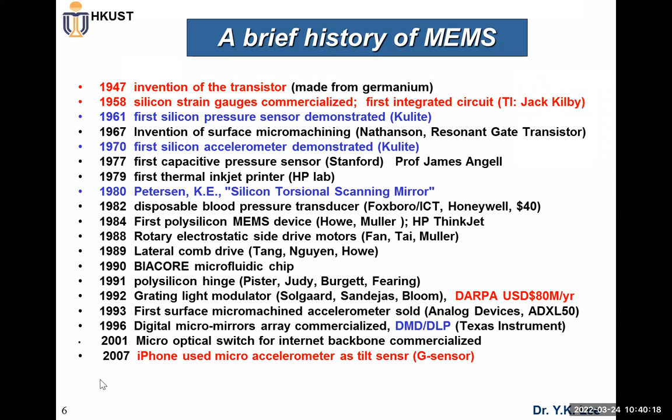Okay, so that of course we also mention about this mature thing. We do spend time to introduce this.

This kind of ITRS - ITRS means International Technology Roadmap for Semiconductor, and it's global consensus. That means leading semiconductor companies and leading semiconductor countries and regions make this kind of roadmap, so that all of you can enjoy

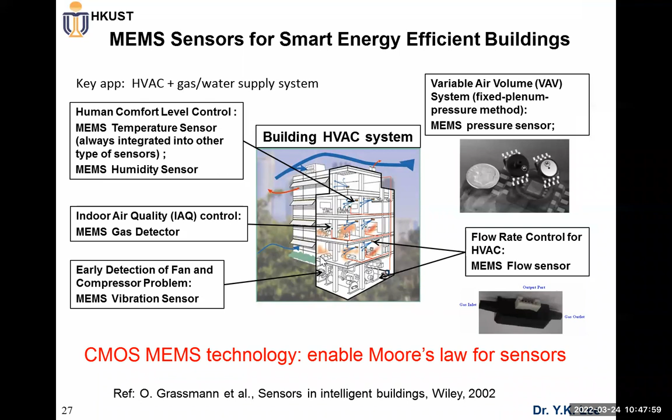Okay, so anyway, as I told you, I had a project several years ago on how to come up with this kind of motion sensor.

Look at the thermal flow sensor, temperature humidity sensor, and thermal comfort, and then smart personalized ventilation, smart window, and building expert work on CFD simulation and AI. So we at least demonstrated we're able to do smart HVAC to reduce energy consumption for at least one room at UST, saving about 20% of energy while maintaining good thermal comfort.

So I just want to tell you this is something quite important, and I do think this kind of micro sensor will really change the world. It's not just me saying this, but all the big companies too - Apple hires a lot of these MEMS engineers. So this is something quite important.

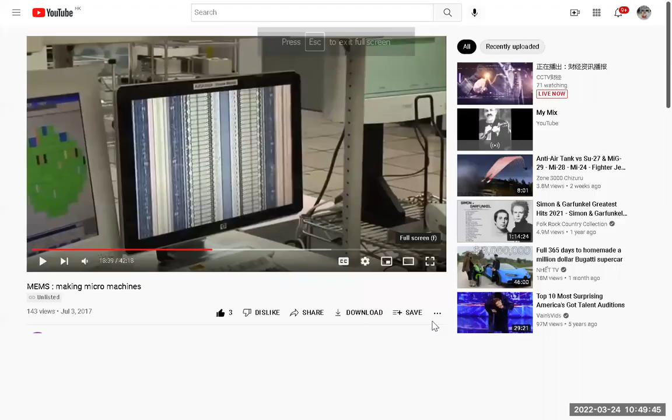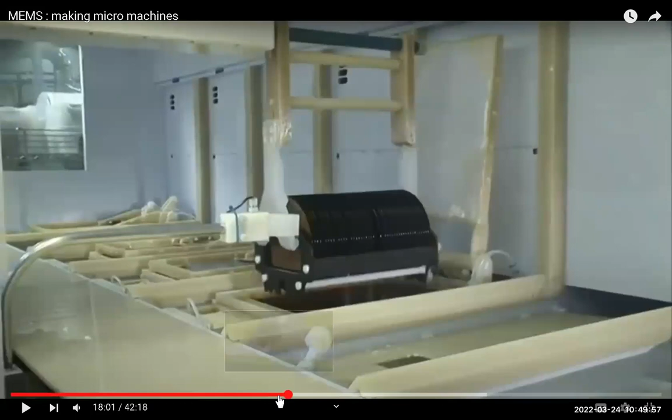All microfabrication processes involve these steps: etching and first patterning. You have the design of a micro machine or microelectronic transistor, from computer software like Cadence, or for MEMS we use another EDA tool like L-Edit. Once designed, you do the patterning - patterning involves photoresist, and then photolithography - and then you do etching, deposition, and doping. No matter how complicated the micro machine is, we have this typical fabrication process based on these 4 steps: patterning, meaning you have an optical mask design and use photolithography for patterning, and then you do etching, deposition, and doping.

Let me try to think - I just want to tell you this is something I think is quite good for you to have a real understanding of. Although you cannot go into a clean room, UST does have a very good clean room, so at least here you can look at how it works.

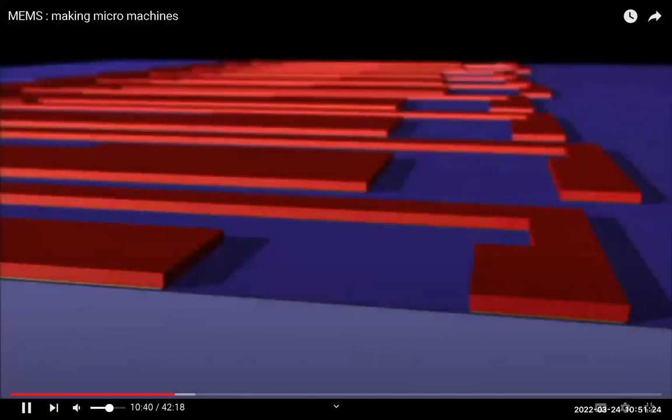The resist is positive. The areas exposed to light are changed chemically. The wafers move back to the track system. Here, developer is puddled onto the wafer, and the exposed areas are rinsed away. It's photolithography. To ensure quality, measuring feature size is important throughout the process. This SEM, or scanning electron microscope, is measuring the dimensions produced by the photoresist process.

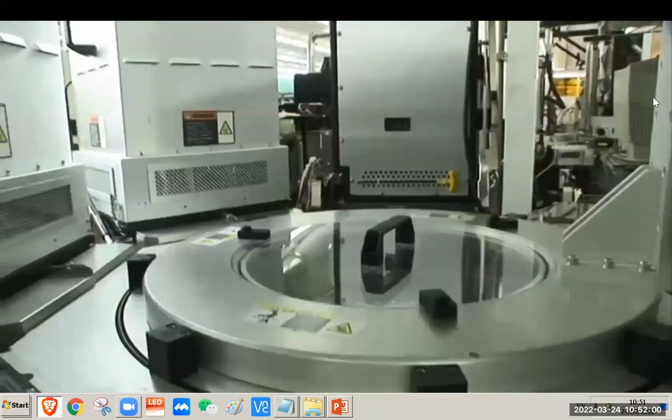The exposed metal will now be etched using plasma. In this chamber, chlorine-based and inert gases etch the aluminum-copper alloy. This defines the resistor leads and removes the highly conductive aluminum-copper layer from the area where the resistor material will be. While still under vacuum, the wafer moves to the ash chamber, where the photoresist and etch residues are evaporated and pumped away.

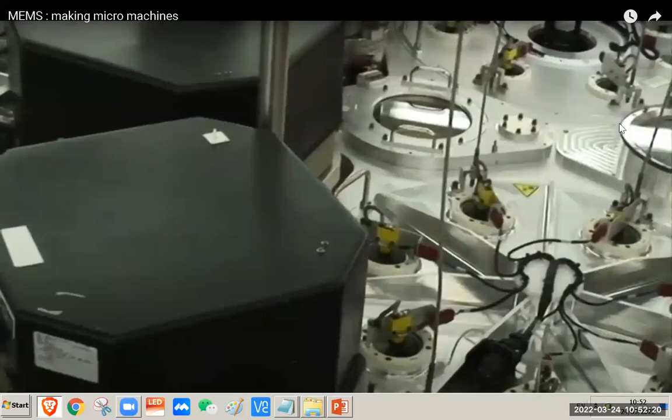The resistor metal is now deposited. After the wafer surface is conditioned, it goes to the sputter chamber, where a thin layer of resistor metal is deposited. Photolithography once again patterns the resistor metal layer. In the plasma etch system, the resistor metal layer is etched from unwanted regions. When current is eventually forced from 2 metal layers to 1 thin metal layer, it will create the heat that fires the resistors.

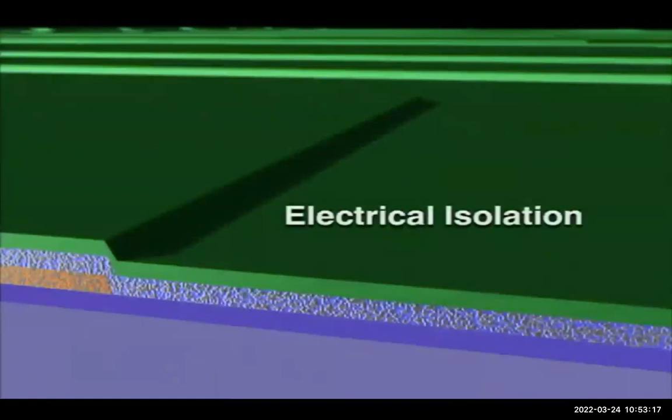A thin film stack of 3 layers will now be deposited on the resistors to provide electrical, chemical, and mechanical protection. This system deposits the first 2 dielectric layers over the resistor. The first layer will provide electrical isolation between the ink and the firing resistor. In the same chamber, new gases deposit the second layer, which protects against the corrosive chemical attack from the ink.

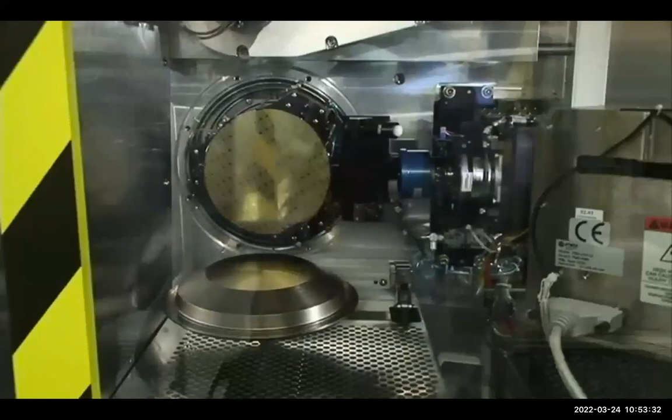The third protective layer is metallic, so it can resist the mechanical forces of the collapsing bubble. The wafers go into a sputter etch chamber to prepare the surface, and then into a sputter deposition chamber, where a thin metal layer is deposited.

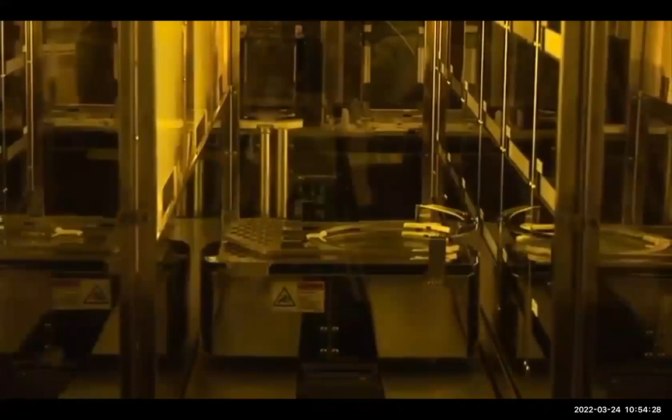Now that the resistors are protected, the chamber walls where the vapor bubble forms are built. The wafers are washed and prepped. A deionized water and ozone treatment removes any residual materials that might remain on the surface from previous steps. The deposition of barrier material used for the chamber walls is similar to the photolithography process. As the wafer spins, a thick negative resist-like material is spiraled onto the wafer. In soft bake, the solvent is slowly driven out to set the barrier material and make it more uniform.

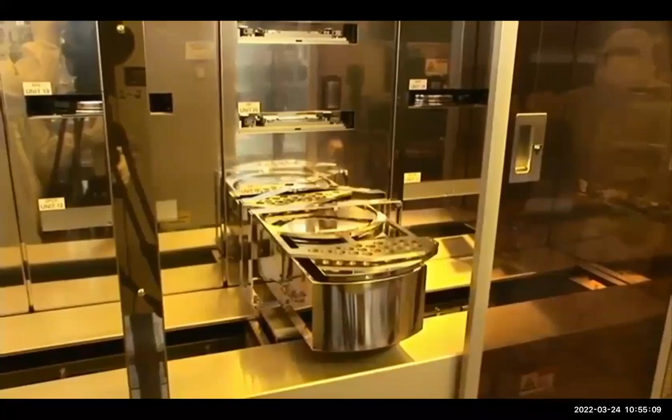In this bake and expose system, the wafers go directly to the stepper where they are exposed. As a negative resist, the barrier material exposed to light forms a polymer and hardens. Because this resist is so thick, the exposure times are much longer than for standard photoresist. After exposure, the wafers move to the bake ovens. The areas exposed to light induce cross-linking and become a permanent part of the chamber. The non-exposed areas are removed when developed.

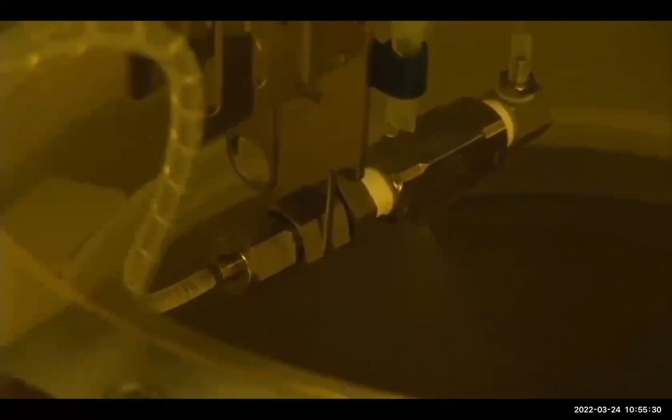Instead of the usual puddle develop, spray develop is used here. Spraying droplets of developer provides a higher surface area that can attack the thick barrier material more easily. A big open chamber now exists. We can see that small pillars have also been created from the barrier material. These pillars at the entrance to the chamber serve as a filter to block particles that might be in the ink from clogging the nozzle.

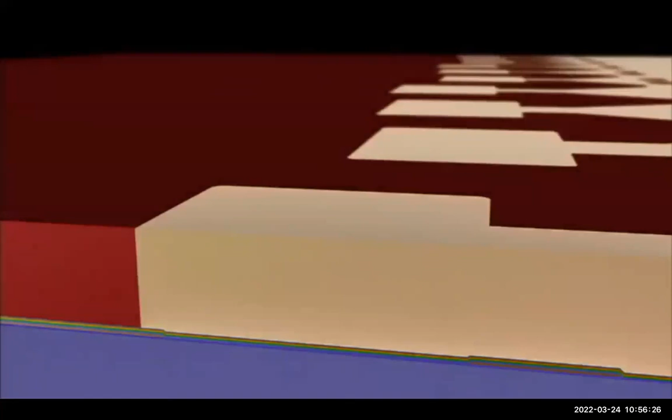After develop, the wafers are placed in an oven, exposed to higher temperatures, and allowed to cure. Thickness measurements are made after each layer is cured. A thick photoresist resin, called a sacrificial wax, is spiraled onto the wafer and spun. The wax fills the cavity and covers the entire wafer. A soft bake sets the wax, and a portion of it is removed to bring it flush with the chamber surface. The wax holds up the shape of the chamber as the building process continues.

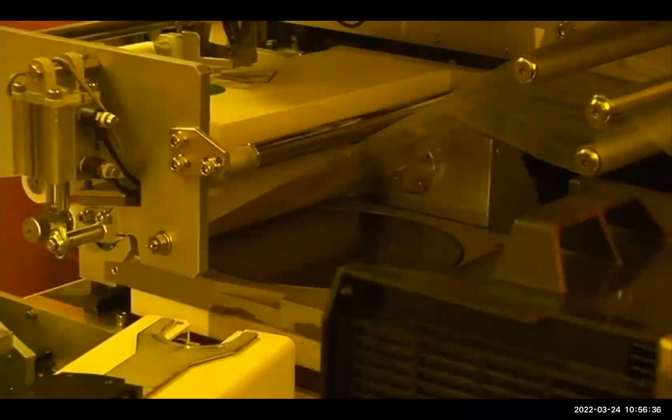In a dry process, a layer of barrier material is pressed onto the wafers to create the nozzles. The nozzle material on this roll is sandwiched between two protective sheets of carrier films. The dry application will minimize the interaction between the nozzle layer and the sacrificial wax. Here, the bottom carrier film has been peeled away, and we see the nozzle material placed directly on the wafer. After the dry film is applied, a blade cuts around the remaining films, and a new layer is prepared for the next wafer.

The robot moves the wafer with the nozzle material and its carrier film to the next stage. In a separate tool, the carrier film is removed. A strip of tape is rolled across the wafer, and a pickup roll lifts the carrier film off.

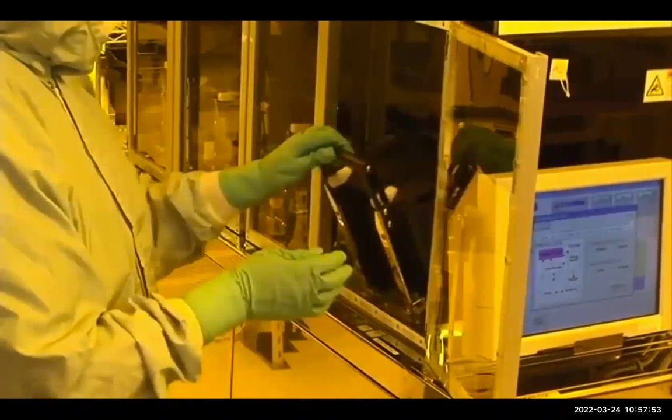Photolithography is now used to create the nozzle orifice. The exposed areas become cross-linked and remain a permanent part of the print head. When developed, the unexposed nozzle material and the sacrificial wax are removed. The wafers undergo a final cure.

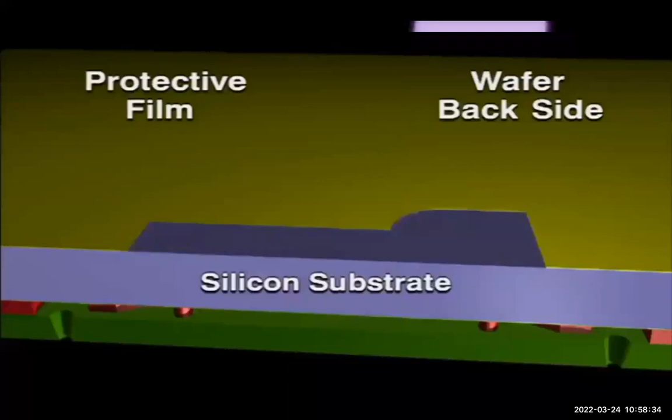To create the channels the inks will flow through, a laser and etch process forms a trench between two rows of nozzles. Inside the laser system, the wafers are placed backside up. A pulsating laser scans the back of the wafer and defines the dimensions of the slot. Without breaking through the silicon, it then drills a deep, narrow trench within the slot.

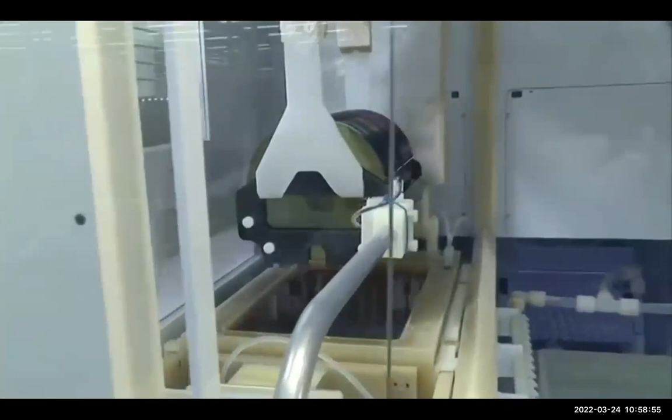The final slot shape is created in a bulk etch process. In this anisotropic etch, chemicals such as KOH and TMAH etch the silicon crystal and remove the remaining thin silicon layer left after laser micromachining.

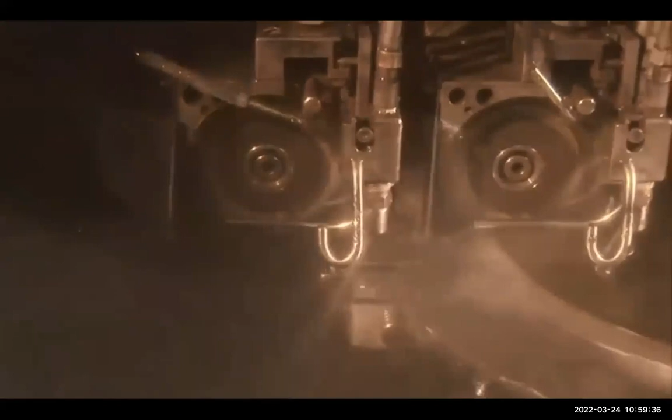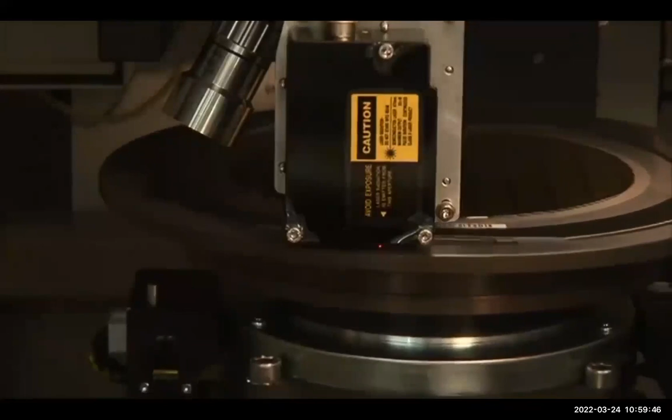Wafers are automatically mounted onto a ring and tape. This holds the die in place as the wafer is sawed into individual units. Following singulation, the wafers are rinsed and dried to remove any particulates. In a final visual inspection, only the functioning die are examined before they are shipped. The camera on the microscope is programmed to recognize certain patterns. It highlights defects for the operator, who then confirms or rejects them.

The sawed wafers are packed and shipped to various HP sites. There, the good die will be attached to a pen body like this one, which is becoming a permanent fixture in printers today.

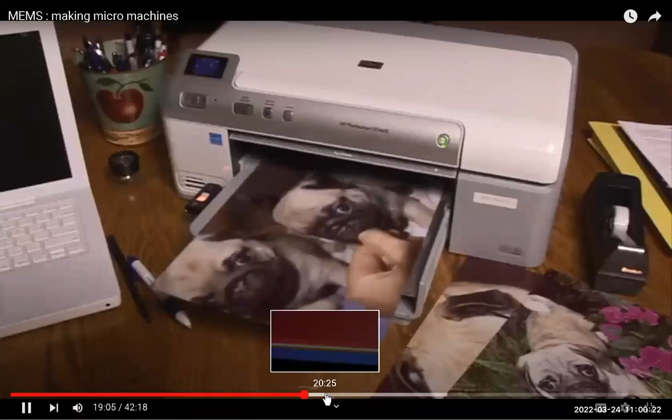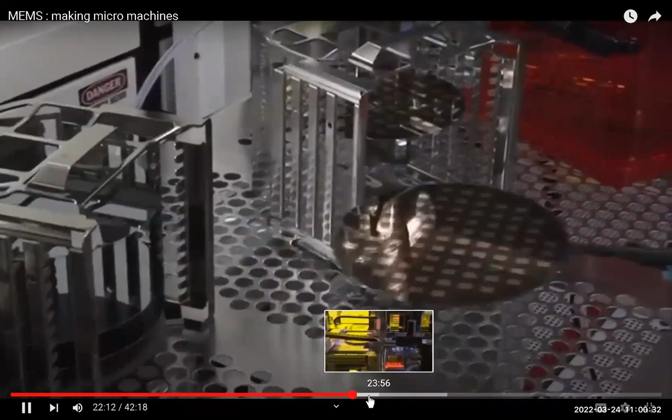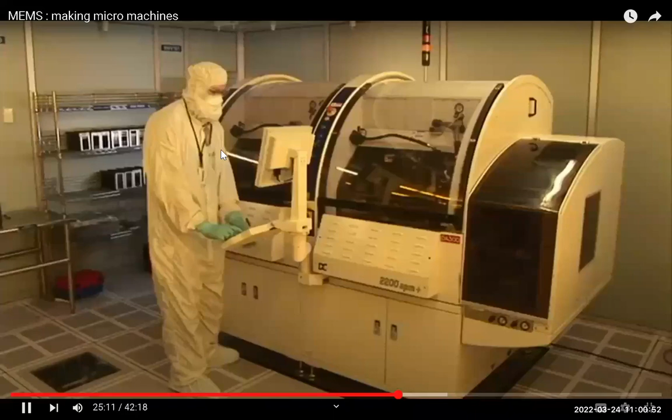Okay, so some students say actually this part has been watched. Optical MEMS, so I think we manipulate light. Maybe we skip this part. So I see some students mentioned, I think we have some overlap, some video clip, so maybe we can skip. Let me check.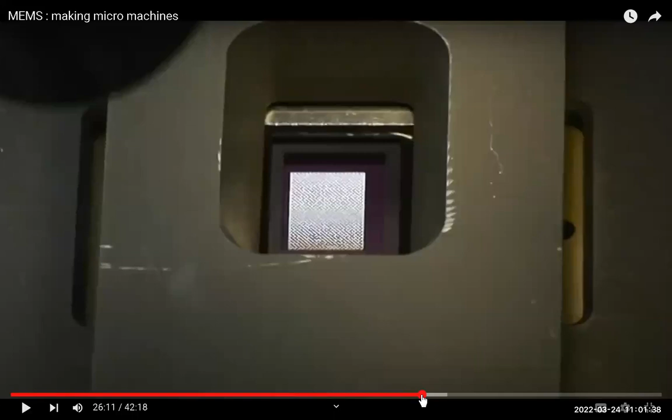One student said you don't need to memorize the part, but at least this is additional information, the video, for you to understand the lecture notes. Do you understand? Because compared with the lecture notes, this video can really let you see, in a very short period of time, how to make this kind of thing, how this device works, how we can make this thing. I do believe this kind of video is quite useful.

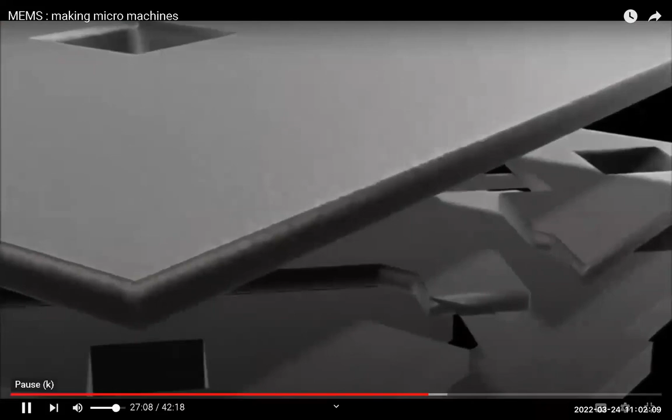The mirrors flip back and forth continuously. But do you understand? So another key point is to let you know about this device. Remember, TI spent 20 years. Do you understand? Texas Instruments spent 20 years working on this DMD chip.

So then the question is, you look at the video, can you understand? And if you really learn about this kind of thing, then you can become rich. Because there's only one company that can make this TI chip. I know that many companies in Asia, Taiwan, China, and many places, even Japan, want to make this DMD chip, but no one can.

Oh, one is still asking, what is the DMD function? DMD can be used for computer projectors, and can also generate some new products. I will show you later on. I think it's quite important, what the student asks. One of the major applications of DMD is computer projectors. So this is the major application. One student asked about

the major application of DMD. The DMD micromirror, at least in mainland China, across the border, is used in computer projectors, or pico projectors, portable projectors. You can carry a very small projector. Of course, micromirrors can also be used for the HoloLens, VR and AR functions. Micromirror DMD is one; there's a series of things.

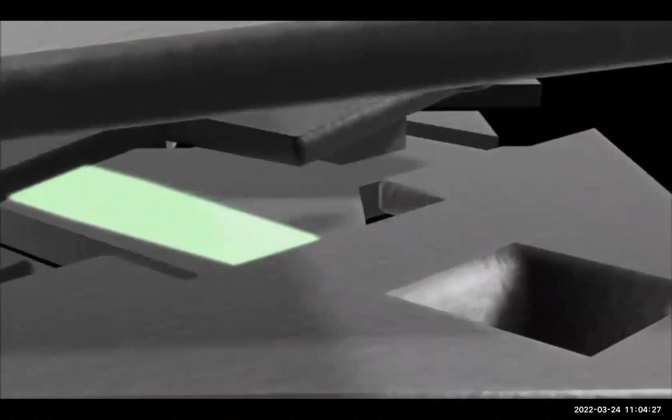So at this moment only one company can make this one: TI. Small structures tend to stick. The mirrors rely on the restoring force of the torsion hinge to return to the flat, on or off state. Basically, apply a voltage, and then it can generate electrostatic force, right? Looking closely at the yoke, we can also find small left and right spring tips. These tips deflect slightly as they land on the lower surface. When released, the stored potential energy provides a slight kick that helps overcome adhesive forces.

As I mentioned, that's an interesting thing, you see. This is contact, so the micromirror touches the substrate, this kind of silicon wafer, and then sometimes there's a sticking problem. So this is actually much more complicated. It's non-trivial. That's why TI spent 20 years to make this work, from a demonstration working in the lab to mass production, increasing the yield. Wow, they spent $1 billion and 20 years. It's really non-trivial.

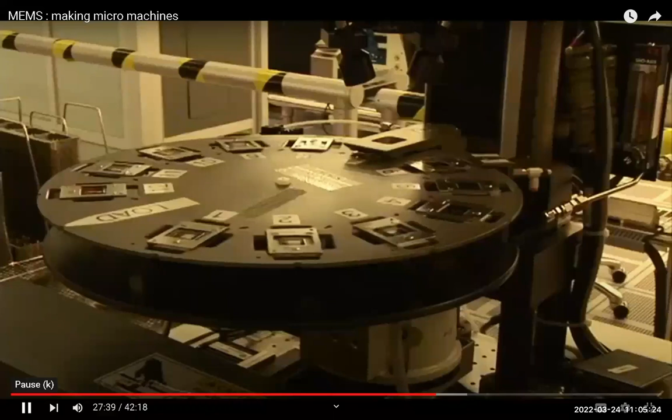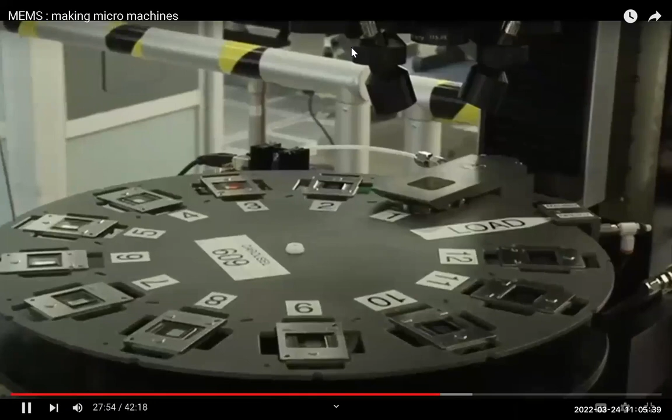After burn-in, a tester measures whether or not the mirrors tilt. A second tester checks the mirror movement by applying various voltages and measuring the responses. These movements can vary between devices with different angles and mirror sizes. The final test is a visual test. The image is projected using different colored screens and inspected to ensure there are no defects. A defect projected on a black screen, for example, may not show on a dark background, but will show when projected against a white background.

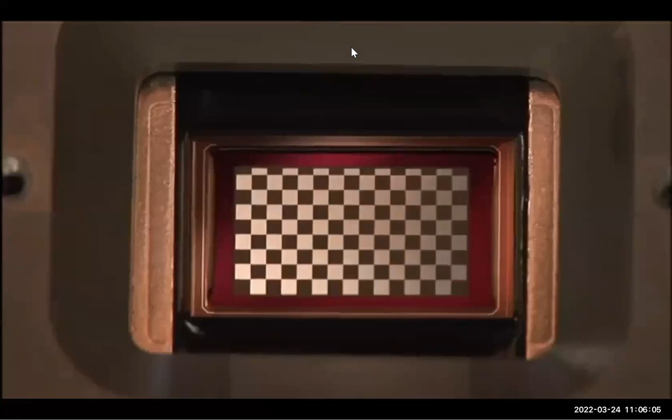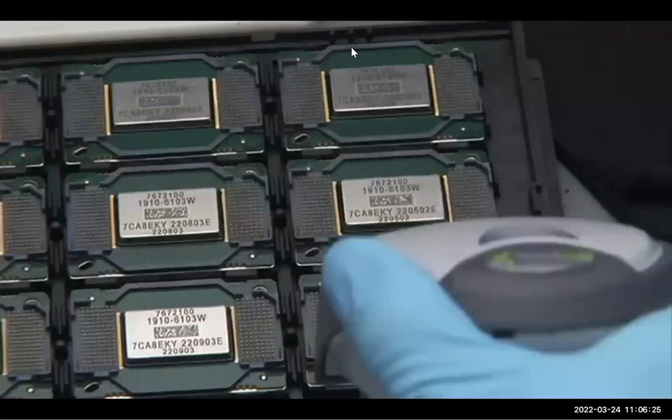Here we see a test device which has been programmed with specific images. The mirrors reflect the image in black and white. These same images, reflected from the DLP device, go through a series of lenses and color filters to be projected in color. A laser brands the appropriate information on the back of the DLP devices before they are shipped to the suppliers around the world. They, in turn, produce the many projectors we use on a daily basis.

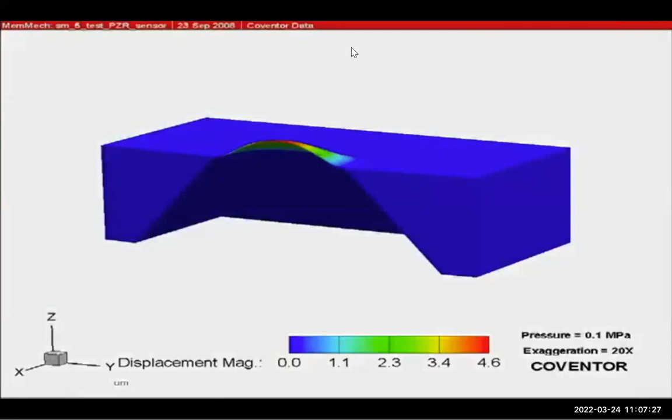To see how sensors are designed, let's go to Freescale Semiconductor. Designing MEMS devices is a critical part of manufacturing and a team effort. Experts bring together the mechanical and electrical design and manufacturing aspects to create complete microsystems in different fields. Two of the most common types of sensors monitor pressure and movement. Pressure sensors measure pressure change in gases and liquids. In most cases, a thin silicon membrane responds to a change in pressure and triggers a response. This requires an opening in the package to keep one side of the membrane exposed to the environment.

In cars, they monitor things like combustion pressure to improve fuel efficiency and side crash detection. These sensors monitor the air pressure of tires. These monitor blood pressure. Inertial sensors measure a change in movement. They include accelerometers and gyroscopes. Accelerometers measure linear movement along the X, Y, and Z axes. They detect acceleration, which is a change in speed or direction. They are used in cars for safety-critical applications to improve dynamic control. In this electric car, they deploy airbags, while pressure sensors monitor tire pressure.

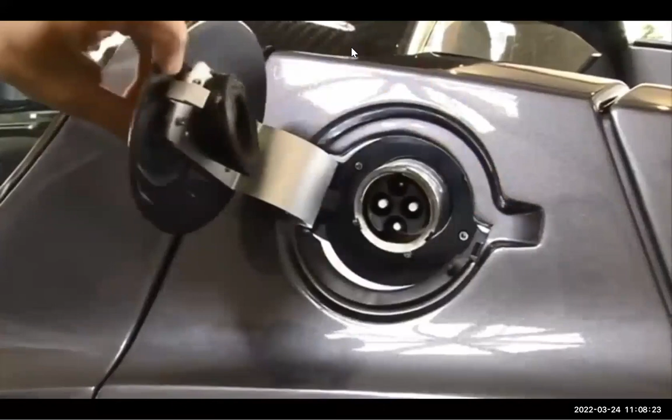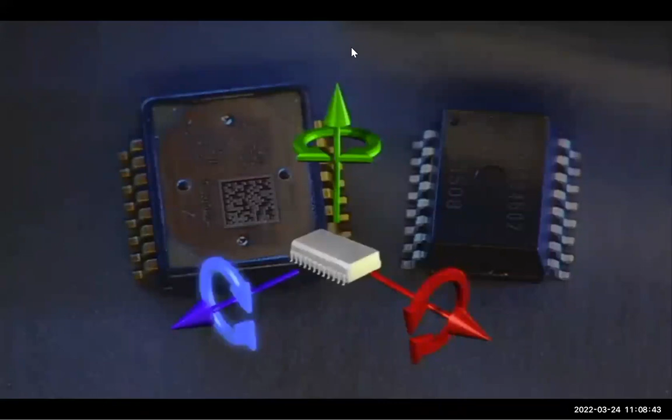36 psi rear. Accelerometers are found in a variety of motion detection consumer products. In sports, like golf, they provide information to help improve one's swing. A lot of measurements. If we keep that shoulder tilt down. Gyroscopes measure rotational movement, known as yaw, roll, and pitch. These gyros are used in cars. When they sense a car has lost control and begins to roll, they deploy a side airbag.

The design of sensors and MEMS in general is done in an iterative top-down workflow that requires revisions and feedback. This process typically begins when the customer presents requirements to a team of mechanical, electrical, and systems engineers, as well as marketing and sales experts.

There are some things here that we have changed the way we're doing with the next line of cars that we're going to be looking at. You all were proposing a digital data output, and we think we'd like it to have an 11-bit. To still be able to meet that same timing. Which is most important, Daryl, the package change or the 8-bit to 11-bit? We did anticipate you might have some challenges with going from the 8 to 11-bit. It's just that going from an SOIC to a QFN, it just takes 3 months for a qualification. I would assume that with your new requirement for 11-bit, you would be able to get into the next model year and still be fine. At a later date, we could provide the additional 11-bit ADC conversion. That might work.

The project requirements are then presented to the design team, who scope the project and establish a roadmap. What we learned in the first meeting is that they not only want a digital part in SOIC 16, but they also want a digital part in a QFN and an analog QFN by the same schedule, by the same time. So the package, I'm a little concerned about that.

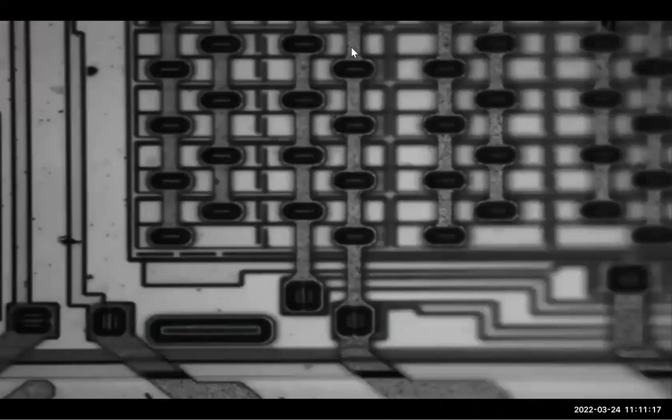So then I guess we'll try to arrange with the customer to get some extension for you guys, and then we'll just meet again here internally. That would be great. Let's take a look at the project from the different perspectives of the designers who are working on it. The mechanical designer determines the limitations of the mechanical transducers. This is the part that converts motion into a change in electrical signal, such as capacitance. This signal is read by the electrical or application-specific integrated circuit, known as ASIC.

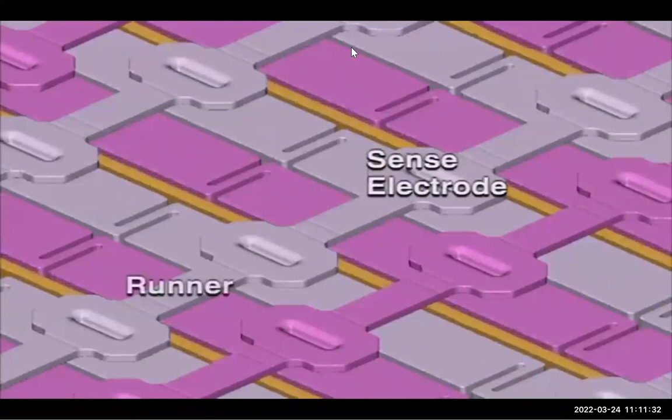With accelerometers, an abrupt motion or acceleration moves the proof mass. Each sense electrode, connected to runners, collects the change in capacitance signal. The runners, connected to electrical leads, carry the signal to the ASIC. The ASIC designer checks that the change in capacitance, which is converted to a voltage, meets the circuit's requirements.

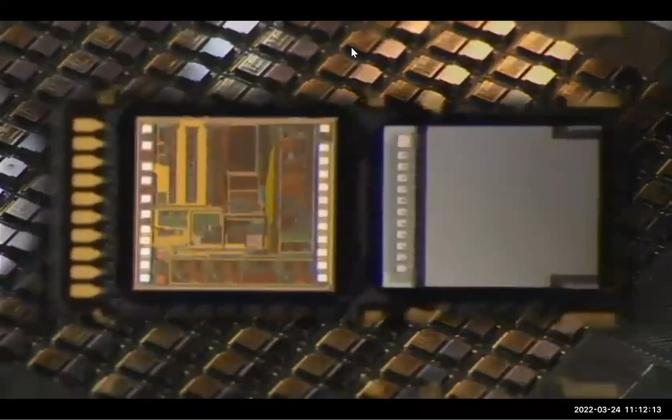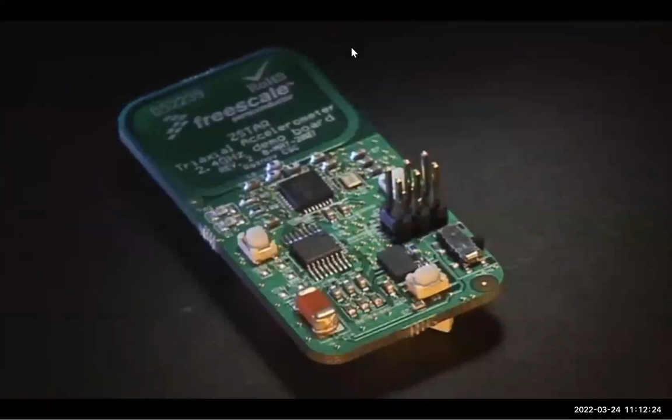The systems engineer creates an architectural level design and writes the specifications. These specifications can include the level of integration or layout of the device. With system in package, a sensing cell measures the force of acceleration, which results in changing capacitance. Freescale's IC design converts capacitance to voltage and allows the sensor to be calibrated or checked for accuracy. This particular sensor is used in the game Guitar Hero.

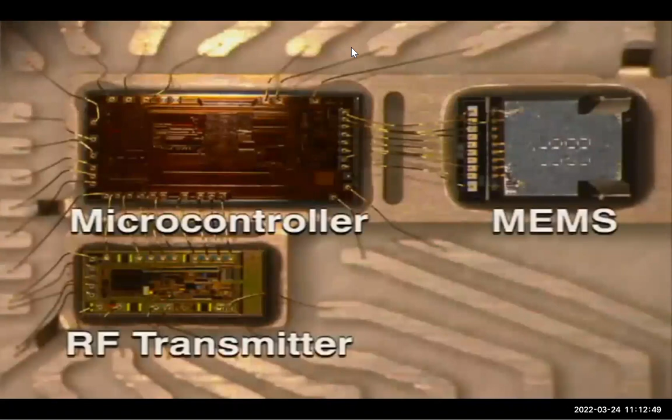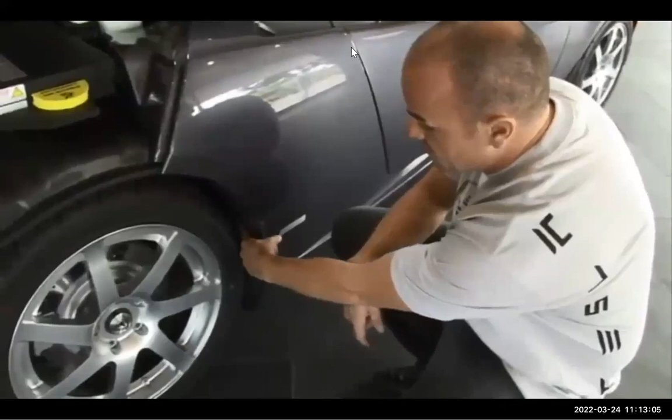Some sensors bond the die in a stack formation to reduce the footprint. Here we see the pressure sensor. On the other side, we see three devices: the microcontroller, radio frequency transmitter, and a dual-axis accelerometer. These stack devices can track the motion in golf swings. In cars, they monitor sensors without using wires. It's picked up by basically a sensor or a receiver that's integrated within the wheel well of the vehicle itself.

After scoping, partitioning and model generation is the next phase. Here, the Microsystems Group partitions the components of the system into blocks that represent the physics of the mechanical and electrical chips. Each block has a mathematical representation that consists of lines of equations or code. The design often starts with a few lines of code. More lines are added to enhance the model's details and set the operational parameters.

The transducer model allows designers to predict proof mass motion. They do this by applying different accelerations to the model. The calculations they use address issues like mass and stiffness of the proof mass and the change in capacitance. Other equations determine electrostatic attraction and internal gas resistance that dampens the motion.

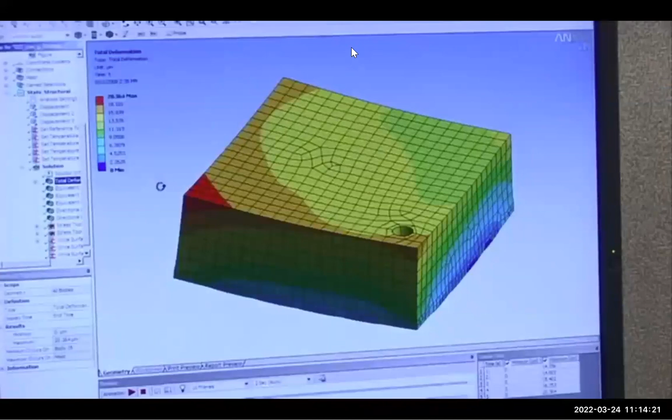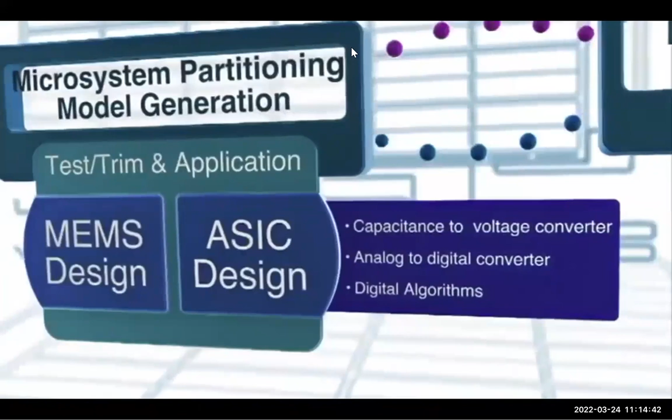The package model determines the effect of the packaging, including stress, on the performance of the MEMS chip. The result is a transducer systems block that predicts the changes in capacitance. These changes will be monitored by the ASIC logic chip. The ASIC designer works on the conversion of capacitance to voltage. The voltage is then sampled and converted to a digital signal.

The designer then applies final digital algorithms. Some of these will be used to set up the conditions for the final testing. Once the system engineer feels comfortable with the partitioning and modeling of the MEMS and ASIC designs, the work progresses to the analysis phase. Here, the systems designer brings the two together to find out how they work. MEMS and ASIC blocks simulate performance and ensure the results meet product specifications.

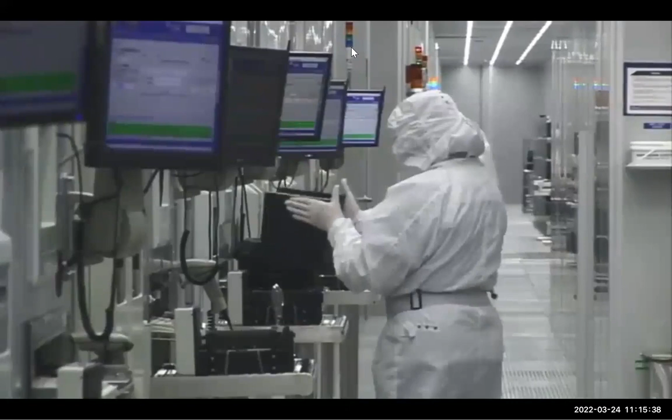While the design needs to be represented in a mathematical format, it also now needs to include the impact of fabrication. With surface micromachining, deposition, photolithography, and etch produce feature sizes that may not exactly match the design. The designers need to know how the process works.

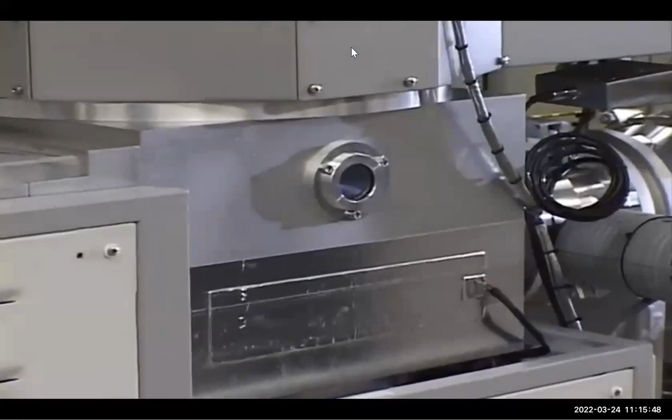For example, a deep reactive ion etch, known as the Bosch process, creates deep straight-etched walls by alternating chemicals used in the etch chamber. These high aspect ratio structures increase the surface area of the sense elements vertically. As a result, the chips will need fewer elements and can therefore be made smaller.

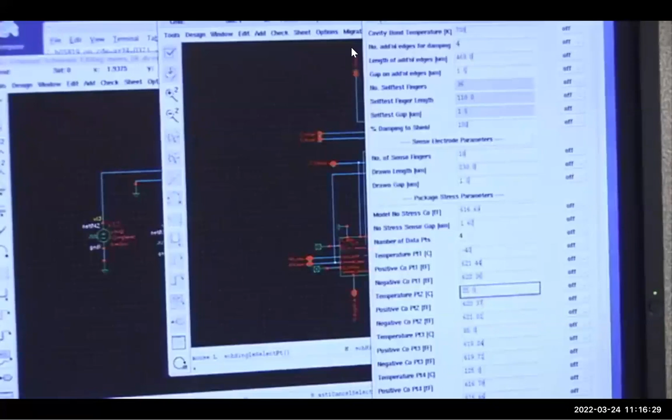Designers make adjustments, and data moves up and down the process flow 2 to 5 times or more. Models run over and over again as areas are repartitioned or variations tightened. Before the process finishes, the final data is checked against the design specifications again.

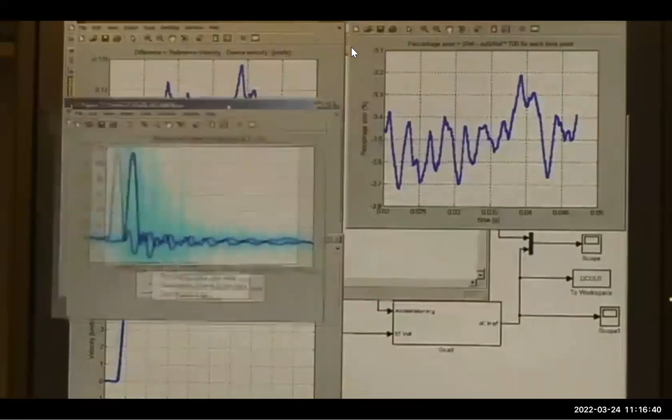In verification, the systems engineer receives and checks analysis data. The mechanical designers verify their MEMS design with layout 2D CAD tools, and circuit designers execute and verify with transistor-level schematics. Once cleared, the mechanical and electrical designers create their final designs, known as tape-out. The project then moves to fabrication.

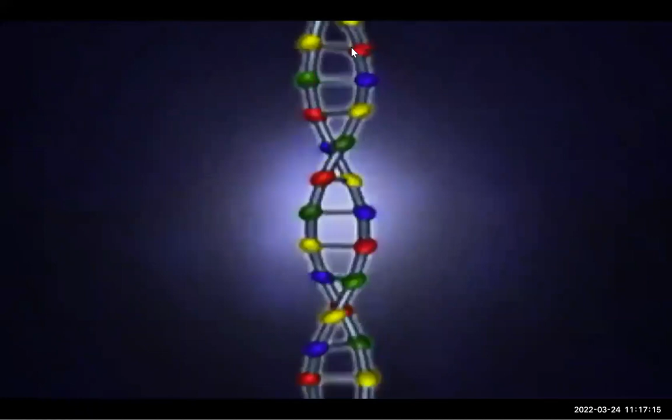There are many types of MEMS devices. Biochemical microarrays printed with stacks of specific peptide sequences and used in DNA studies can quickly identify the existence of cancer. Tiny cantilevers or probes used in the atomic force microscope map the surface of atomic structures. MEMS serve as a bridge between the micro world and the even smaller nano world. As technology moves forward, the potential of MEMS devices is vast and limited only by our own mechanical ingenuity.

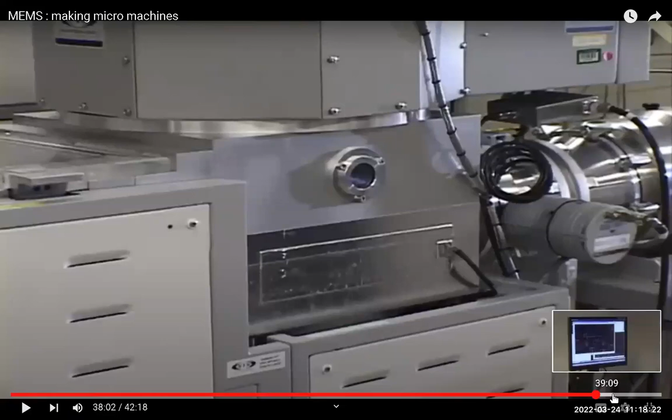Okay, so do we have any question about this video in terms of several devices, right? Including this kind of DMD, digital micromirror, microfluidic, and this MEMS sensor. Do you have any question about this video? One student asked about the DMD or micromirror application. It's quite an important technology. It's something that can lead a $1 billion business.

I'm not joking. In the video there's one particular thing at the end. Let me show you this particular one. So this is called the OET, optoelectronic tweezers, invented by my UC friend. Actually, he became Professor Eric Chiou, in Professor Ming Wu's lab. They published the paper. It's called OET, optoelectronic tweezers.

So that means using light. Actually, it uses DMD, digital micromirror, so that with an AC electric field we can apply some force to manipulate the biological cell. This is one important technology invented almost 15, 16 years ago. And then this created a company. Can you believe? Professor Ming Wu did an excellent job with this device, published a paper in Nature in 2005, and eventually continued to develop it into a real product. His company is called Berkeley Lights, and Berkeley Lights actually had an IPO.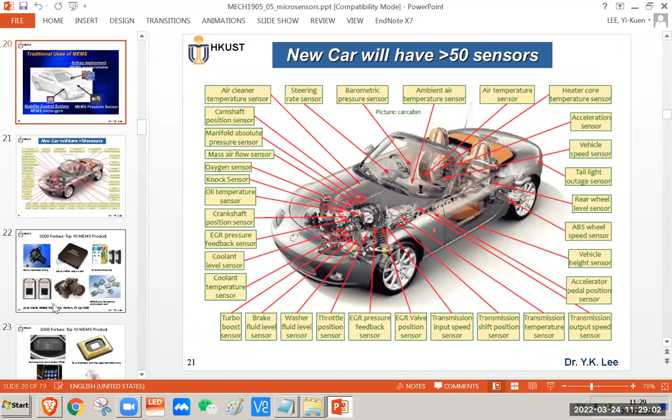I was surprised most of you cannot answer this kind of very simple question. Let me quickly go here - we do mention this one. You see, pressure sensor - I drew all this for the engine.

I'm surprised some of you cannot answer this simple question. Why does an engine need this kind of pressure sensor? Because in an engine, we have to mix air with gasoline oil, and by right mixing of air and oil, fuel mixing, we optimize the ratio and get the best combustion process. So this pressure sensor is used to control the mixing of air and gasoline, the fuel, in a car engine, so that you have a much more efficient way to run the engine.

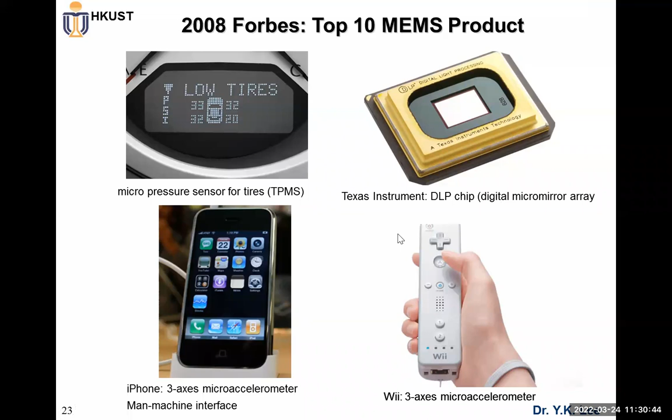This is something, of course, later on we also mention why we have this kind of pressure sensor used in tire monitoring, TPMS. This is one of the most mature tire pressure sensors, TPMS, which has become much cheaper. TPMS pressure sensor for tire increases safety. This is something we already discussed now at least multiple times, I think two days ago.

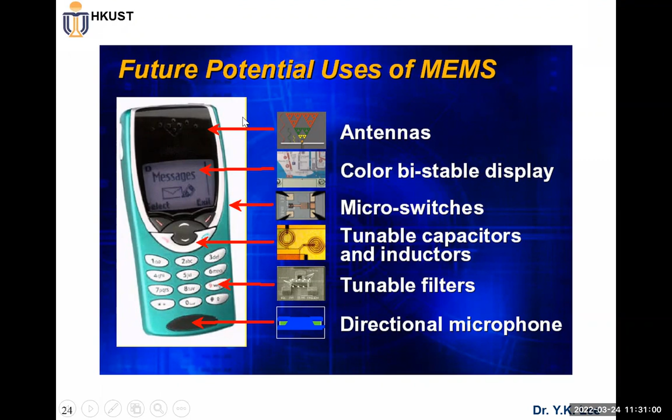I do hope that you can really understand. Of course, pressure sensor is also in your smartphone. But why do we use a pressure sensor in a smartphone? Why? Smartphone pressure sensor is used, sometimes they call it barometric pressure sensor.

What's this kind of barometric pressure sensor in smartphone? Basically, this sensor tries to look at the altitude or something. Every smartphone has GPS, right? GPS - we have a good student, Jing Ho, who mentioned it detects this kind of altitude, which is quite important. So our every smartphone has GPS, which can provide this kind of coordinate system, the X and Y coordinate system, right?

Why for navigation? But if you try to go through a tall building, in this case the barometric pressure sensor can provide the altitude. So in this case, for navigation, it's quite useful.

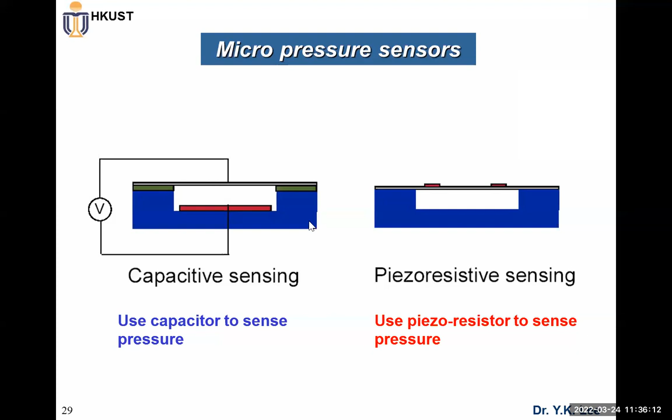Why? Of course in a real product in your smartphone, it's not only micro pressure sensor design. This requires you understand solid mechanics, and also piezoresistivity. For the real pressure sensor, it's not only the kind of very thin diaphragm. This is on top view, right? As I showed you on the previous slide, once the pressure is applied we call it deformation here, right?

So then we have to integrate this kind of electronics, analog signal conditioning circuit, and even digital signal, because the output from the sensor, the signal is too small. We need to amplify this signal, so most likely we have some amplifier for the very small signal from our micro sensor, so we need a very good design for this amplifier circuit in the IC design.

And also sometimes in many computers and smartphones we have digital electronics, so we have to convert this kind of analog to digital. That's why this has become quite important, right?

So this kind of pressure sensor has existed for almost 30 years, maybe probably 40 years now. Starting from the first integration in 1970, but now you see every smartphone has this kind of low cost MEMS pressure sensor. So this is something that has become quite important.

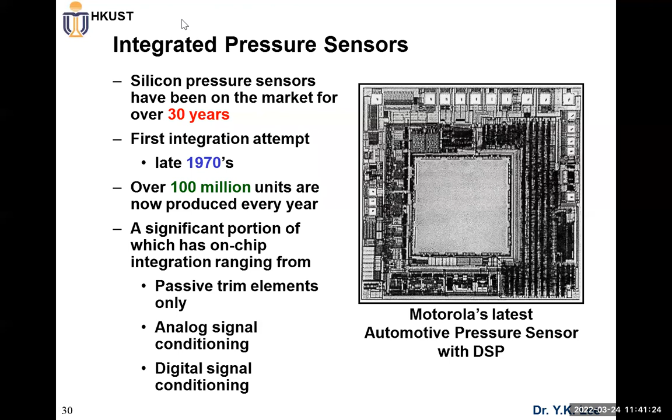If you look at your smartphone, I think both Android and iPhone iOS systems have this kind of barometric pressure sensor app. As I also mentioned last time, you can download sensor kinetics so you can look at all the sensors in your smartphone. Another important thing is about MEMS accelerometer, also mentioned in the video I just showed you, about how this kind of micro accelerometer works.

Basically it's a meter, right? It's a meter to measure acceleration. Of course, sometimes smartphone companies don't call this a micro accelerometer; they call it a G sensor. If you look at Apple's iPhone, they sometimes call it the G sensor. So if you download something like Sensor Kinetics, you can really look at how you get real data from your smartphone accelerometer. So that's something important.

Here I just briefly mention how this accelerometer works. Basically it's very simple. Again, you have a micro mass-spring system. You have a very tiny mass, and you have a spring. This is m, k, a micro mass-spring system, just like we have simplified here. Once you move your smartphone around, it causes vibration of this micro mass-spring system as a function of time.

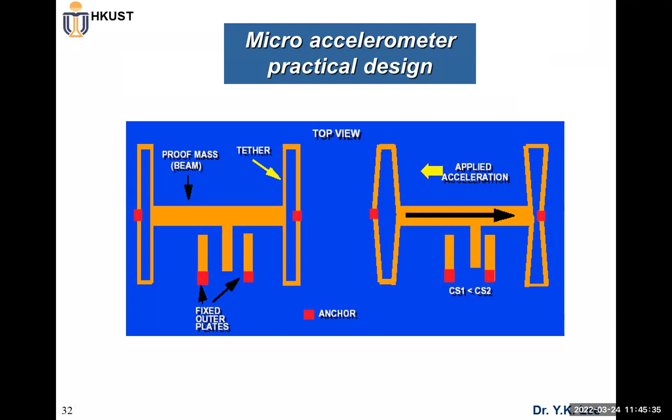And of course, in a real product, it's non-trivial. To have a very good design for a real product, you can look at this. Basically, you have a much more sophisticated folded spring. This requires you to study a lot more mechanics and mechanical design. And not only one simple pair of electrodes, you have a series of micro capacitive sensing to improve the performance of the real product. Do you understand? The previous slide shows the very basic concept, but in reality, you need a lot more engineering design to get a good design.

And of course, for sensing with this kind of sensor, we also need to integrate analog circuits to amplify the very weak signal, for example, design some operational amplifier circuit, and then turn it into a digital signal. So they have a series of designs in terms of micromachine design and also IC design. As I told you, it's still non-trivial, but now it's become so common. Every smartphone or even smartwatch has this kind of motion sensor, right? In the video I showed you,

they also use it in VR, AR, MR. All of this needs MEMS motion sensors. It becomes so important. So do you know how many of these sensors are fabricated every year? That's quite important for you to think about how big the market is. How many MEMS motion sensors are fabricated every year? Do you have an idea?

At least billions of these low-cost MEMS sensors are fabricated every year. It's billions, not 100 million. Billions of MEMS motion sensors are made every year. It's quite an important business. I told you this area keeps expanding, so for those of you who want to get rich, this is quite an area. Even if you don't know how to make a sensor, you can know how to use the sensor for real applications, right?

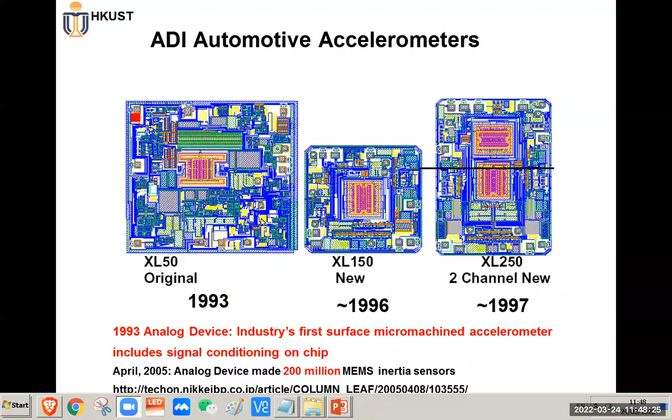So now, I would say the micro sensor becomes so important, not only for smartphones, smartwatches, smart buildings, or smart self-driving cars. It's quite an important technology. So of course this kind of sensor is going to expand a lot more. Of course, as I showed you, this is a very sophisticated design, a micro mass-spring system, right? And now every iPhone and smartphone has this 3-axis motion sensor, the MEMS accelerometer, and also the gyroscope.

The gyroscope is also quite important. Basically, how does the gyroscope work? The traditional gyroscope is very large. It's like a spinning mass system, like in World War II. The traditional mechanical gyroscope is quite important for navigation and control of airplanes, but it is being miniaturized. The traditional gyroscope is most likely a spinning mass, this kind of mass-spring system, for the traditional mechanical gyroscope.

But for our smartphones, the gyroscope is basically a micro mass-spring system. It is also a mechanical mass-spring system, but still a micro mass. You have this inertia M and K, a micro mass-spring system. So you have a harmonic vibration, and then you have linear motion.

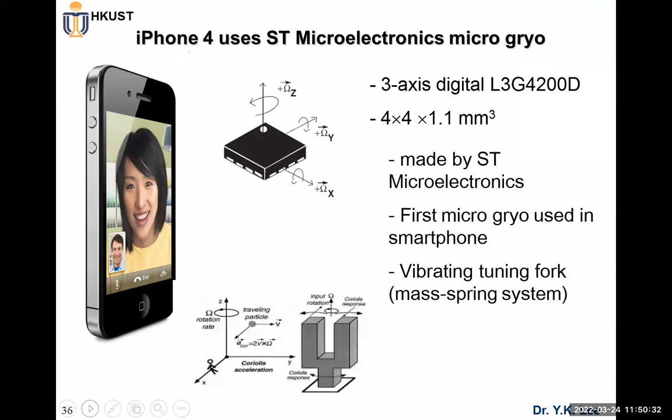And of course, I showed you the real picture of the iPhone, which uses STMicroelectronics. And also, of course, you have a micro magnetic sensor as a digital compass. This company in Japan, Asahi Kasei, is the number one company making low-cost magnetic sensors for every smartphone. It's basically a Hall effect sensor, okay? It measures the magnetic field of the Earth, right? So you have this digital compass, and an additional app in your smartphone.

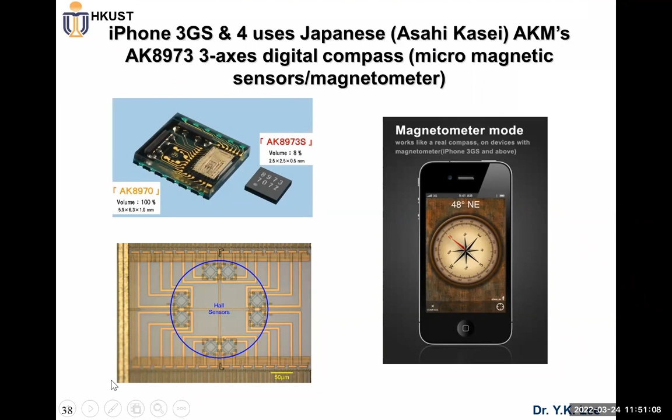And of course, the DMD, as I showed you: 20 years and almost $1 billion in R&D before it finally became a real product. Only one company. That's why several companies in mainland China are really trying to think about how to make their own.

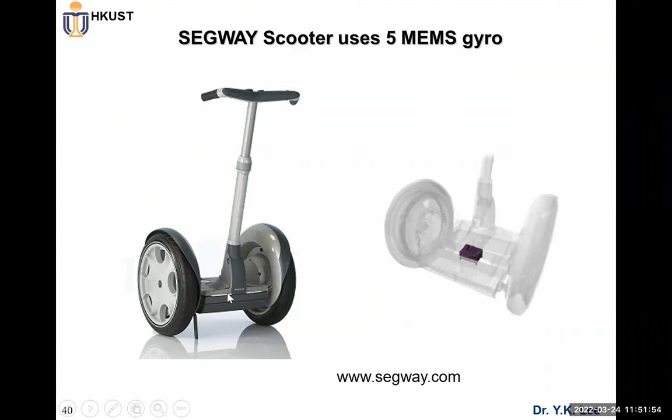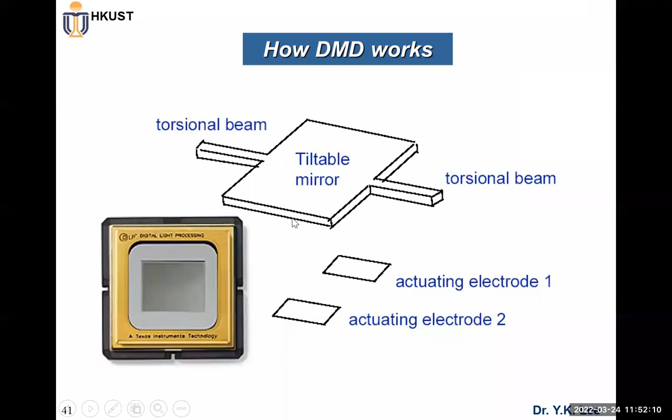And then, of course, MEMS motion sensors are used for the Segway. So this is quite important for motion. I think we almost ran out of time. So in today's video, we will show how it works, especially electrostatically. Once you apply a voltage, the electrostatic force can turn a micromirror in a digital way, so this is quite useful for computer projectors.

There's a series of companies in mainland China that buy DLP or DMD chips for real products. At least one company in Chengdu went public on the mainland China stock market. But you see, if the US government bans TI from selling this, then this company collapses. That's why I have an ongoing project on how we can make micromirrors, in case the US bans this kind of US chip. I do think it's quite important to make our own. Of course, DLP chips can also be used to make TVs and also VR and AR. So this is quite important.